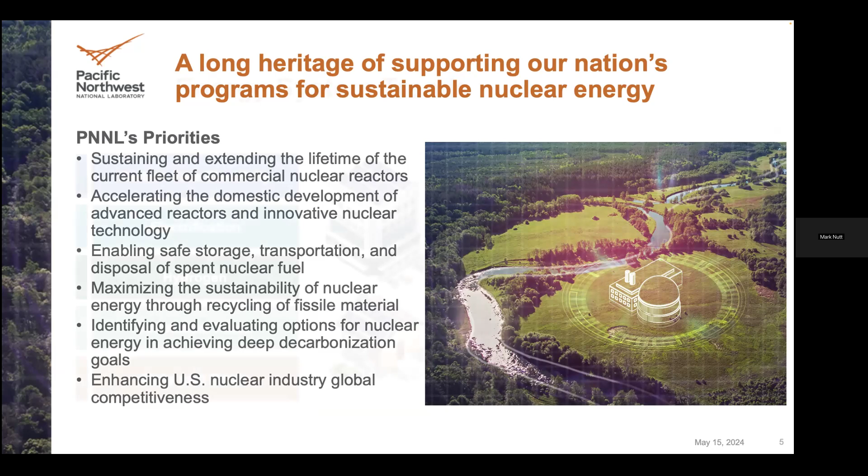So where are we seeing the trends go? A lot of folks want carbon-free electricity. The state of Washington, absolutely, we're supposed to be carbon-free by 2045. Driving that is a big drive toward electrification—electric cars, electric everything in your house, electric heaters and steel mills, you name it, they're trying to electrify it so they can get the carbon off it. Also use it to generate hydrogen—huge hydrogen fuels for potential heavy haul trucks, trains, boats, driving on hydrogen, as well as other alternative fuels that could be more carbon neutral.

That's driving it, and we're wanting to do it fast and big. The demands are growing. We're seeing data centers come online, we're seeing AI stuff come online, we're seeing the onshoring of supply chain and other manufacturing that we're trying to bring back. All that has energy demands.

So that's driving it. As an example, in the Tri-Cities we've got the southern end of the Hanford site that wasn't contaminated. The government is giving lease of that land back to the community, and they're trying to develop it as a clean energy park, clean technology park. One company that wants to build there is a Swiss company called Atlas Agro, and they want to build green fertilizer for agriculture.

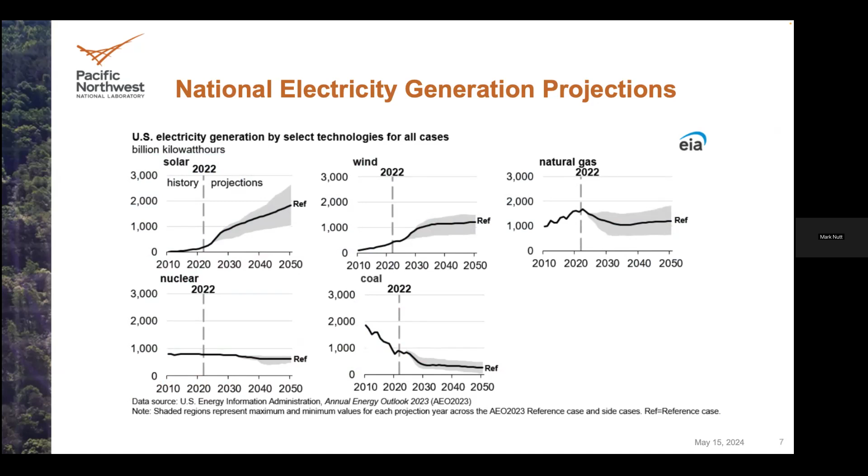Our electricity infrastructure has also gotten—okay, get rid of these things up here. Zoom, probably. I'm trying to figure out where my mouse is. That's just mirroring, I think we're stuck. Oh, there it is, let's do that. Perfect, can I kill that?

So we've got all of this electricity stuff beyond what we've already got to go. So we've got to grow it, and it's got to do all that.

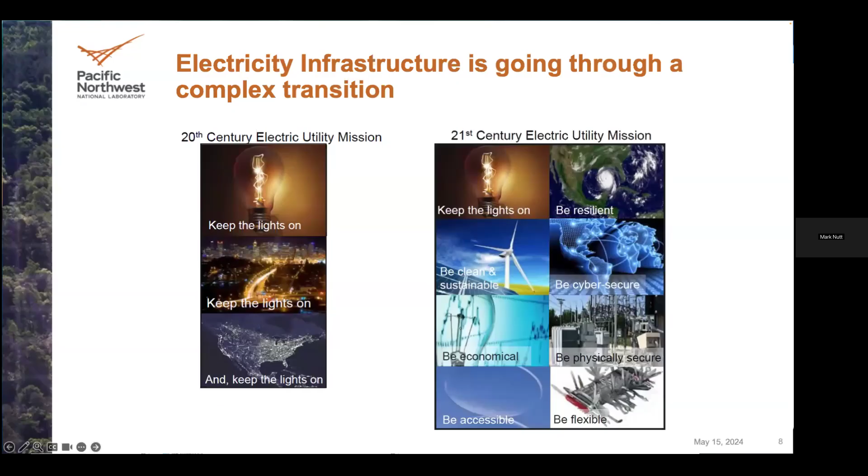Oops, click. Oh, I've got to get back over here. How do I do that? Where's my mouse? No, I just killed it. Oh shoot. Went to the hot corner. Did it again. Love technology. There we go.

So there were two pieces of legislation that came out under this administration that drove impacts. The Infrastructure Investment and Jobs Act put a lot of major investments into innovation and energy infrastructure deployment, so that got things going. The Inflation Reduction Act really put a lot of tax incentives for clean energy adoption.

And what we were seeing up to that was a lot of the existing reactors were getting challenged economically. Back when I was your age going through school, nuclear is very capital intensive to build and very cheap to operate. The fuel and the operation is relatively cheap—big expensive plants to build, cheap to run.

So what started happening is even plants that had been built, the older plants, they'd recovered that investment—they amortized the plants and got their investment back, and we're just running on fuel costs. Everything should be cheap, they should be making money, cheap affordable power. They ran into trouble with natural gas.

So in about 2006-07, everybody was projecting that there was going to be huge demand growth. So there were a lot of people, a lot of companies looking to possibly deploy new nuclear. So there was a lot of licensing actions, a lot of work done. There were going to be a number of plants. It was going to be the nuclear renaissance.

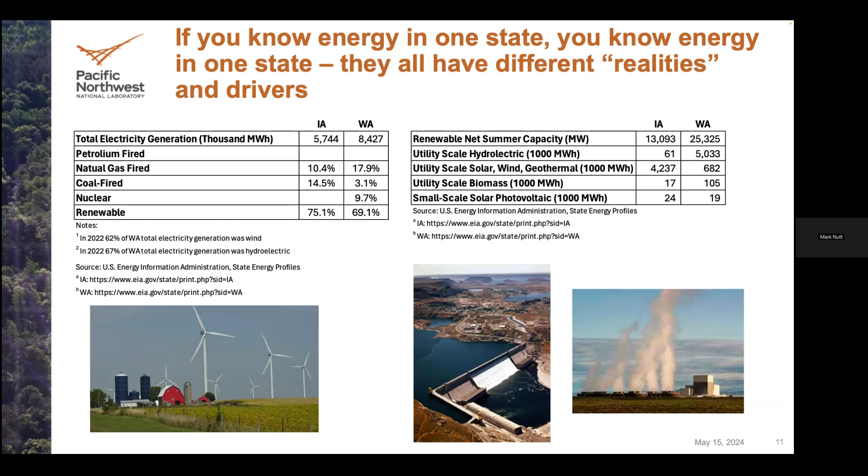So why are we thinking now? Why are people considering it? Well, we've got carbon-free power laws that are out there in Washington. Other states are looking at them. We're wanting resilient energy grids as the demand goes up. A lot of demand. We need the grid to be resilient to respond to that.

We're seeing intermittent load balancing. You're seeing solar go on and off. You're seeing wind go on and off. These machines can be used so that when it's coming down, they can come up so you can ride that wave and keep demand. In some areas, you want firm, reliable power generation. If we build that fertilizer plant, we need to come up with 350 megawatts steady. And you could do it with that.

You can also do island mode. So if I have a data center, like Amazon, I want to control my own destiny. I don't want to be part of the electric grid. I'm going to deploy my own plants and they're going to power my data center. They can do that. They can also do what they call black start capability. So if you lose the grid, you don't have to have power coming in to bring your reactor back up. You can bring them from nothing to running full time.

And literally there could just be a saturation of renewables. How much wind can you deploy somewhere? How much solar can you deploy somewhere before you just run out of real estate? And you're seeing that. Talking to people when I was back in Iowa about the wind, some of the regulators in the state said, yeah, we're about done. We can't put any more in because we've kind of filled all the land up down that swath.

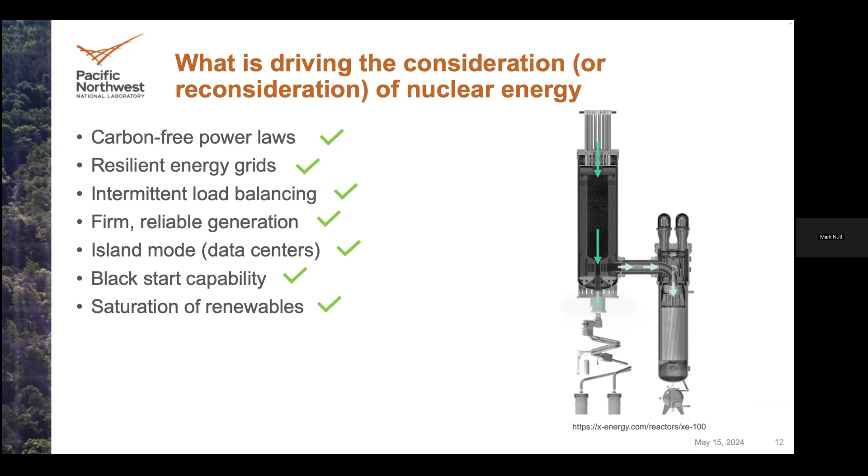Tell me if this is too simple. Basic fission: hit a uranium-235 fissile atom with a neutron. You bust it into 2-3 pieces, and on average 2.5 neutrons come out. You absorb some of them, let some go, and you want one of those to go make another fission, so you keep a critical chain reaction.

Fuel looks like this in one of our existing water reactors. Uranium dioxide ceramic fuel in a tube. The zirconium alloy, highly corrosion-resistant tube gets made into a square fuel assembly. About 200 of these get put into a reactor core, kind of a cylinder. You try to get it as close to a cylinder as you can; ideally a sphere is best for this, but a cylinder will work. You basically use it to turn a turbine. You make steam, you spin a turbine, you get electricity out.

Safety is based on reactivity control. So you've got the chain reaction going on, you're humming along at one, with as many neutrons coming out. You can add reactivity, so I'll pull my control rods out. It'll go a little bit above that, power will take off, drive them back in, level it off. If you need to trip the reactor, you drop the control rods, you absorb all those neutrons, and the nuclear reaction goes away.

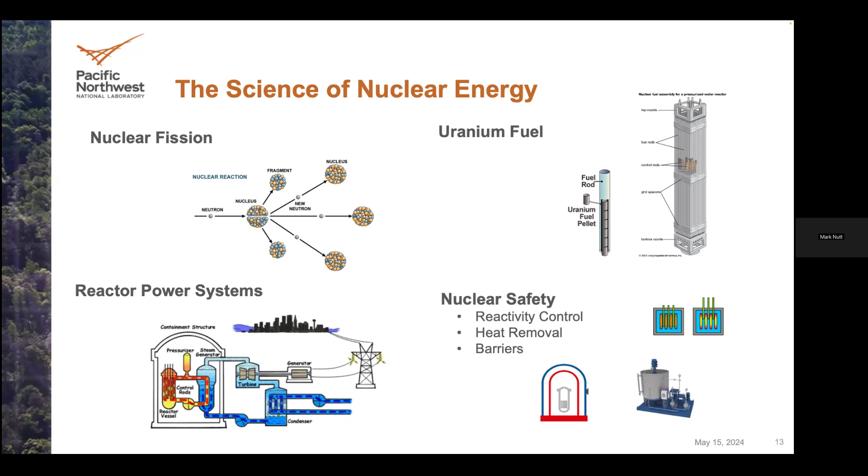Same thing at Three Mile Island. I'll talk to that one in a minute. So another incident. So what's the evolution?

We started with generation 1 reactors in the 40s, right after they got B reactor built over at Hanford, for really big sustaining reactors. We kind of had a split where they went to do defense production, and we started looking at what could be civilian reactors, and they looked at a whole bunch of different types in the 40s and 50s in the generation 1 time frame.

Down selected to what we call light water reactors. They're just water cooled reactors, cleaned up, purified water, regular water. And a lot of that was driven by the Navy going that way for nuclear propulsion. They went with water reactors, so there was a lot of R&D being done on the water reactors that were proven to work in the Navy, and we took that over to the civilian side and built light water reactors.

Essentially all the reactors that we're operating in the US today are Gen 2s. They were all designed for 40 years. Most of them, there's like 1 or 2 left that have not got a license renewal for another 20 years. And there are a few that have received and others underway to get another license renewal to go out to 80 years. So what was a 40-year design is going to be going out upwards of 80 years. A lot of work goes into verifying that, yes, these things are still safe to run and operate.

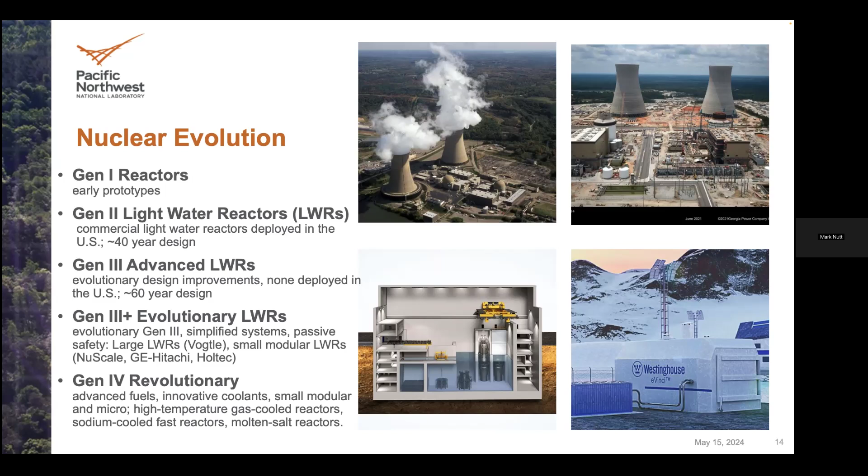And there's the Gen 4. These are the revolutionary machines. Different fuels, different coolants, very different designs that actually capitalize on the work that was done back here and the R&D that was done while these were getting built. So, sodium cooled reactors, those were looked at in the Gen 1 time frame. Gas cooled reactors were looked at then. But we didn't have the technologies. We didn't understand the materials well enough to really want to pursue those industrially. And now we're at the point where, yes, these can come out. We actually have the data where we think we can deploy these.

The big drivers. So what are we looking at in terms of safety? Got to protect public health and safety. There's active, inherent, and passive safety controls. Active: I need to turn that diesel generator on. I need to get my coolant going. I need this pump to turn on. I need this valve to open up. So the machine has to do something to get that coolant going around.

Inherent: can I design stuff to work on physics? As an example, the sodium cooled fast reactors, and why I say fast, they're a different spectrum of neutrons. The light water reactors fission well on slow neutrons, so a neutron will come flying out at about 3 MeV of energy.

Basically, what you do with a light water reactor, it's like playing pool. The one ball hits the other one, that one stops. So you take all the energy out. So I smack it into a hydrogen atom. Hydrogen atom flies away. My neutron is really slow, and then it can cause fission. With a fast reactor, they just get the fuel real close together, and then it'll fission on the fast spectrum. It's just how you design it.

But what those reactors do is when they heat up, there's the material expansion coefficient, the fuel and everything will kind of move a little further apart. And that'll let neutrons go out of the core and not cause fission. So you can actually control safety by just the physics of the reactor. And they did 2 tests on an experimental reactor in Idaho where they turned off the flow, just turn it off. And the reactor heated up and the power went down. And it basically took itself into a stable configuration.

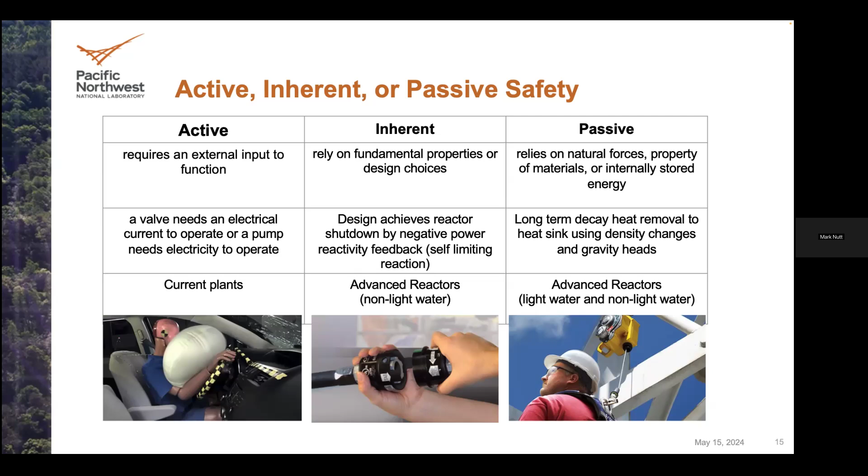So the newer ones are using a lot of combinations of inherent and passive safety to make the newer designs. We have a heck of a good track record on the Gen 2s. There are a lot of active systems, but these newer designs can even be better. And what will that give us? Well, let's step back. So our current power generation, about 95 plants operate in the country. We got demonstrated safety, except for the Three Mile Island accident, which was an interesting one. And you hear talk about automation versus human control.

What they found out with that one in the 1970s is they had a very small leak. And the operators didn't figure it out right. They couldn't read the indication, so they kept overriding it and basically caused the water to go out of the core. They melted the fuel. They had what's called a partial meltdown and melted the fuel about halfway down before they figured out what it was. So there's a lot of work that was done in human factors, getting the operators to understand what they were seeing. There's a lot of work in controls and just culture, and it's kind of like, leave the darn thing alone. It'll trip itself. If it sees it's doing something wrong, let the machine do it. It's how we've designed it. So besides that accident, we've had really good safety.

We've driven capacity factors up over 90%. So while that plant is running, over a year, you're getting over 90% of it dumping power to the grid at its rated level. So if it's a 1,000 megawatt plant, you're getting a 1,000 megawatt plant 90% of the time. You refuel about every 18 to 24 months. So if I got a 2-year refueling cycle, I'm running at 90% or over for 24 months, just straight deliver power. Real high reliability, they're carbon free, they're firm, secure power. So a lot of dependability to the grid with this kind of plant.

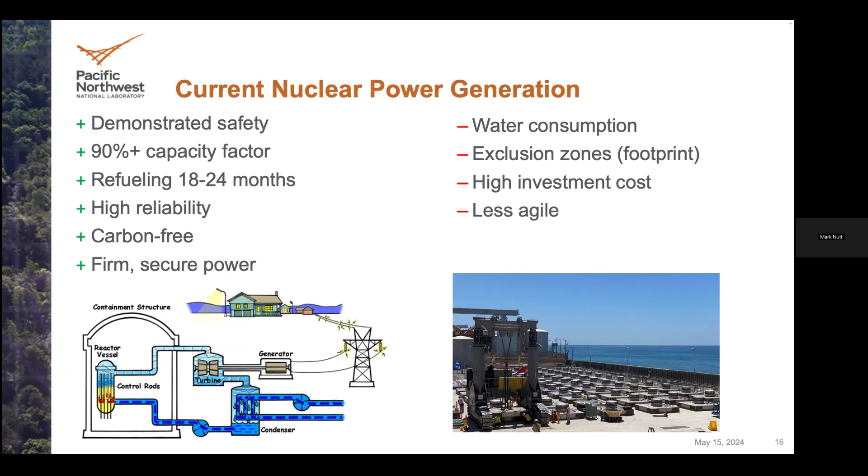So what is an advanced reactor? There's typically a lot of confusion on this. Everybody thinks advanced reactor means SMR, small modular reactor, because that's kind of become the buzzword. In reality, there are kind of three types. There's the big, large ones that run typically 300 megawatts to 1,000 megawatts. These tend to be built on site. You're going to bring in all the pieces, put the reactor together, basically do a big construction, build the whole thing, and get it up and running. Small modular reactors run about 20 to 300 megawatts. The idea with that is I can do a factory build on the reactor, bring it out, plop it in in modules and get it up and running.

One of the fundamental differences is how we're set up in a lot of states for energy: if I'm building this reactor, I can't recover any money from ratepayers until the thing is up and running. So I've got to spend all that capital to deploy 1,000 megawatts before I get a dime back, and I have to borrow all that money, and the interest gets really expensive. So the idea here is to build what you need, put a module in, start generating power, getting revenue, then put your second, third, fourth one in, so you're not taking such a huge capital hit at the beginning.

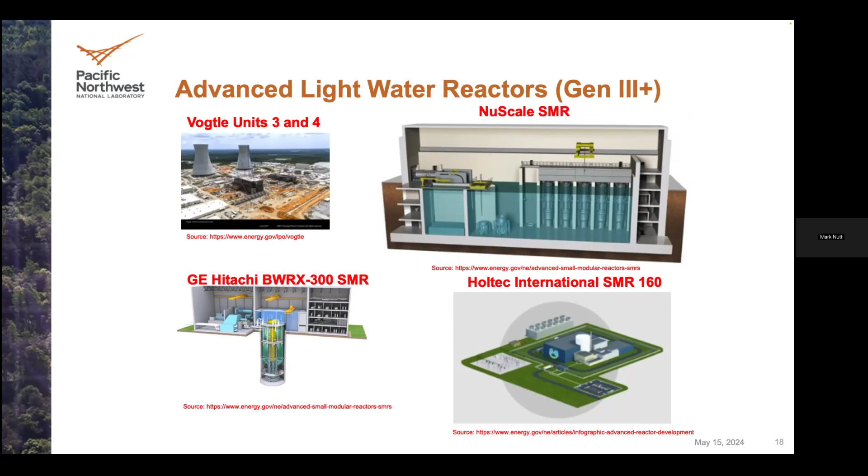So the other side is some of the advanced reactors that are underway. A lot of these are being supported by DOE's Advanced Reactor Demonstration Program. It's basically a 50-50 cost share between government and industry to get these new reactors deployed. How this came about was there were a lot of people, labs and industry and everybody saying, we've done a lot of R&D work. We know how to build these. We just need help. Congress, US government, take some risk off these so they can get a demo done.

We're all talking and Congress finally went, all right, we're calling your bluff. Here's your check, go do it. And now it's like they're kind of like the dog who caught the bus. Like, oh, and we got to do this in 5 years. So there's real heavy drive on these two.

So Natrium is a sodium cooled fast reactor. As I mentioned that earlier, that's one really cool. Sodium goes through fast neutrons. There's been a couple of experimental reactors done, 2 in Idaho, 1 in Washington, over by my side of the state. So there's a lot of test and demo reactors that inform this one. So they're going to build theirs in Kemmerer, Wyoming.

There's been a lot of drive to, can we put new nuclear at retiring coal stations and capitalize on the infrastructure? We need water. We need to hook them up to the grid, because it's almost as hard to build new transmission as it is to build a nuclear plant with all the environmental laws, the permitting, getting the land rights to go. So they're going in there.

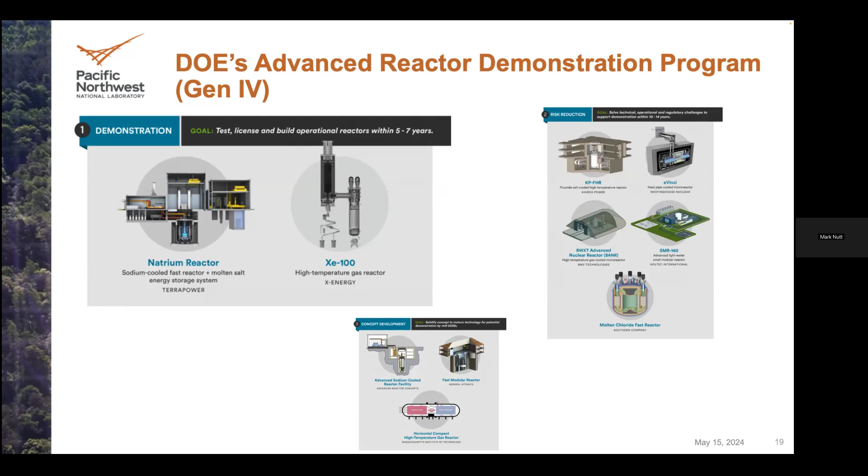This technology fits into our forte at PNNL, because we've got strong materials and chemistry labs. This is less of a nuclear problem and more of a materials and chemistry problem. If you've got liquid fuel, the physics is easy — no pins, no funky stuff. It's just a homogeneous solution with fuel in it, so the physics calculations are easy. But salt likes to eat stuff up, so how are you going to maintain that thing?

What are the challenges of some of these? Again, there's capital costs, and one interesting one is capacity accreditation. One thing utilities have to do is called resource adequacy — as a utility, I have to demonstrate I have sufficient capacity to provide my customers power on the coldest day, the hottest day, whenever they're demanding it. You have to know what your plant is when you do these assessments, to say I can count on this plant for 500 megawatts, 75% of the time. We don't know that yet with these new reactors, so it's hard to figure how to fit them into those assessments while still meeting resource adequacy constraints.

There's also questions with cost modeling over 60 to 100 years for these reactors, which we really don't know a lot about. That's part of what the demonstrations are for — can we get those through and get some data on it.

We have a dearth of construction experience, and there are challenges in the fuel supply chain. There's a lot of uranium in the US, a lot in Canada, a lot in Australia, a lot in Russia, and a lot in Kazakhstan. But the US kind of shut down its domestic mining, and we shut down our domestic enrichment.

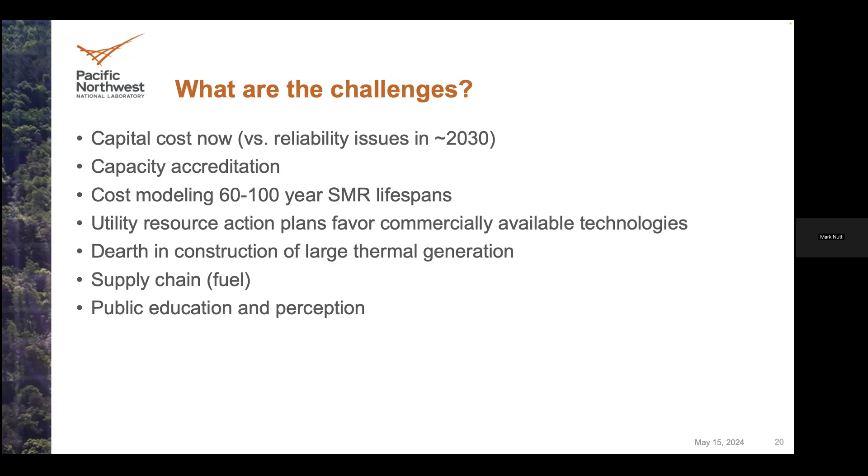And we're trying to bring it back. We got more anxious to bring it back after the Russian invasion of Ukraine — we shut down all interactions with Russia, and suddenly that supply just went away. We've got to figure something out. So there's a lot going on there.

So what are the benefits? Modular design, factory built, scalable. I can feed my data center with a few or a bunch. I can do underground construction to get rid of some of the seismic constraints. I can build it on a smaller footprint. And given a lot of the safety features, I can have smaller exclusion zones.

So when you're building one of these, you have to plan for what you're going to do if there's a big event. With some of these big reactors, with a lot of that active control, our regulators said that exclusion zone can be 50 miles in radius. So you, the utility, have to plan for what you're going to do with everybody within a 50-mile radius. That means you typically got a site in the middle of bloody nowhere where the power's way over here.

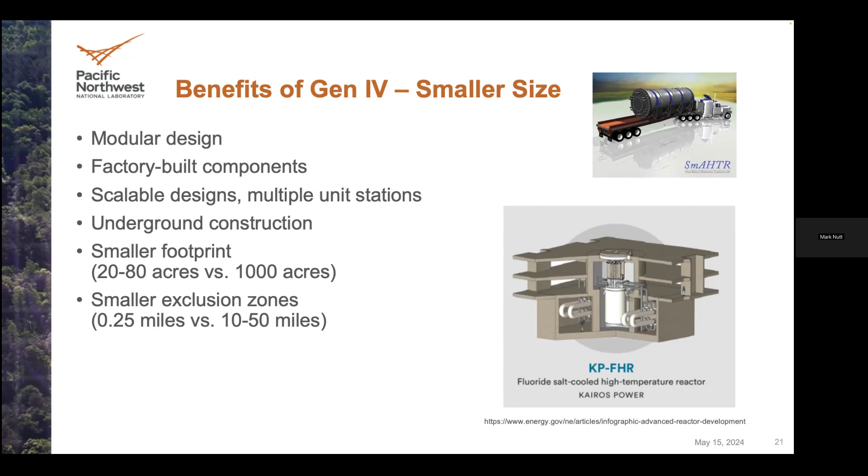With these, they're much safer. So the NRC is allowing you to collapse the exclusion zone, and it's just not as bad. Some of them, they're saying the exclusion zone could be at the plant boundary. That really makes life easier for how you have to plan, because you're not expecting to get that catastrophic accident. You're not expecting to anyway.

They're versatile, they can be flexible. They can load follow, so they can go up and down. They can ramp quickly. The existing reactors, you have to go up really slowly so you don't stress the fuel. These things can move fast. They can black start, I talked about that. They have real short refueling times. Some of them have no refueling times.

I got a molten salt reactor. I'm running a loop. All I got to do is drip in some fresh uranium and then have something on the other side cleaning it up and purifying and getting all the fission products out to keep it going. So I can even keep it running the whole time. They do use less water. There's actually some of the designs they're looking at, like Natrium, they can possibly do air cooled, so I could get away from even having water. All that opens up more siting options.

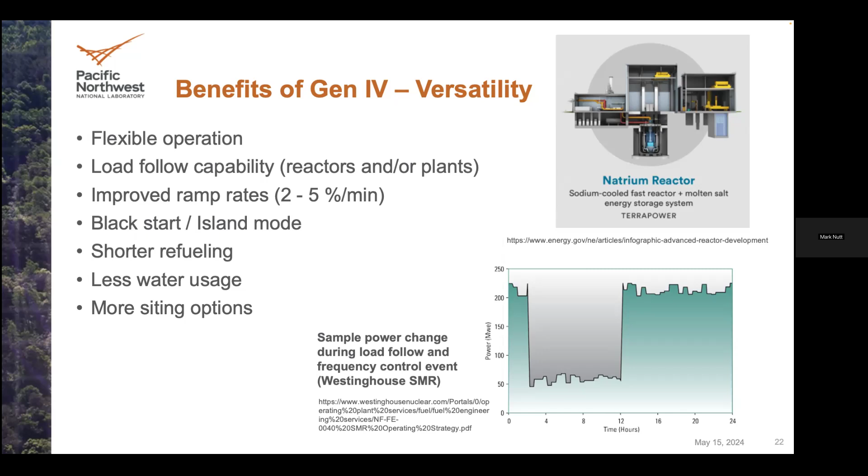I talked about the fuel. This is what TRISO looks like. Here's the fuel kind of in here, a couple layers, 2 or 3 layers of highly non-porous material. And this thing is the size of a tiny little kernel, like a seed, tomato seed, tiny. And you put a bunch of these into a ball of graphite. And you literally put them in and you float gas through, and they just kind of float, and you just move them up through the core on a pebble bed.

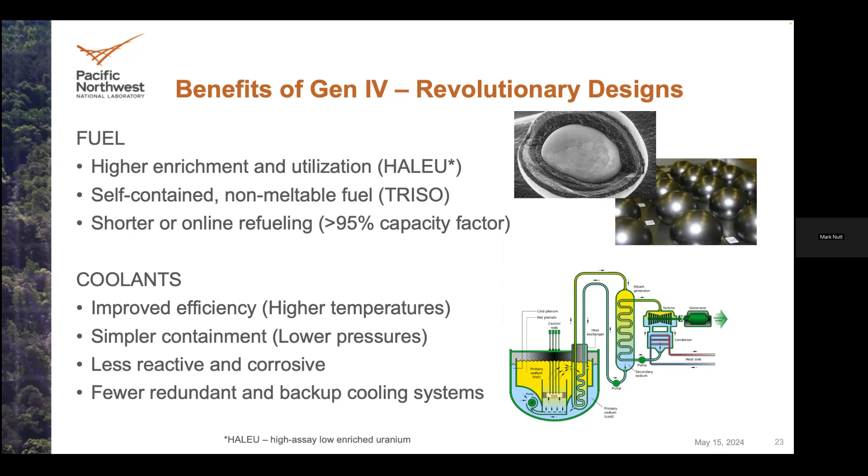Coolants improve efficiencies. I can have simpler containments because I'm operating at lower pressures. They're less reactive and corrosive. You know, liquid sodium is not corrosive at all, no problems, but it burns in air. So if I get a little crack, I got an issue. So a lot of these are covered in argon gases. And fewer redundancy needed.

Our new fleet - I talked about NuScale, they were going to put their facility, their first reactor, in Idaho. That project got canceled. Got canceled, not for safety reasons, it got canceled because there were too many people worried about whether there would be cost overruns. So they could not get the municipality subscriptions - they couldn't get enough people to buy the power, so they had to cancel the project. GE Hitachi and the Tennessee Valley Authority are pursuing putting one at the Clinch River site.

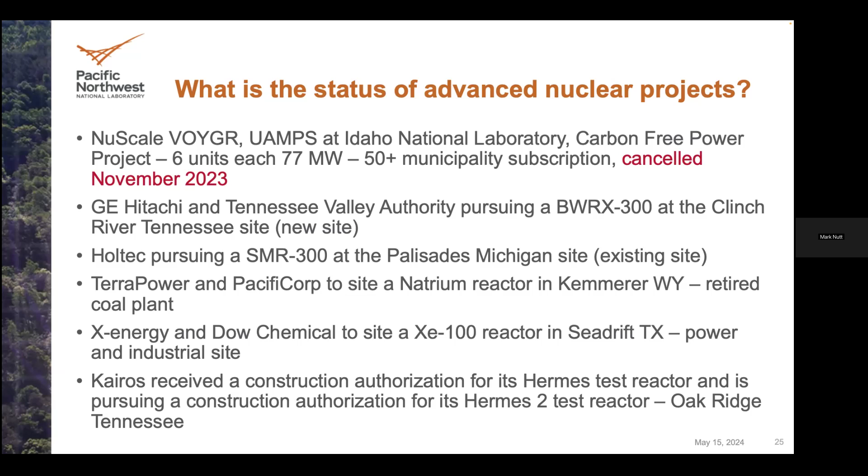Talked about TerraPower in Kemmerer, Wyoming, X Energy in Texas, Kairos, the test reactor side. There's a couple more on this. So they shut down the Three Mile Island plant in Pennsylvania. And now they're going to want to restart that one just to provide power to Microsoft. There's talk of restarting a nuclear power plant that was shut down in Iowa to provide power for data centers there. So plants that came down are starting to get talked about re-upping.

States are active. A lot of things are changing legislation-wise. There's laws being changed to put value on carbon-free electricity in these states. There's financing and tax incentives going on in some of these states. So again, every state's different. They're going after the climate side. They're trying to incentivize based on money.

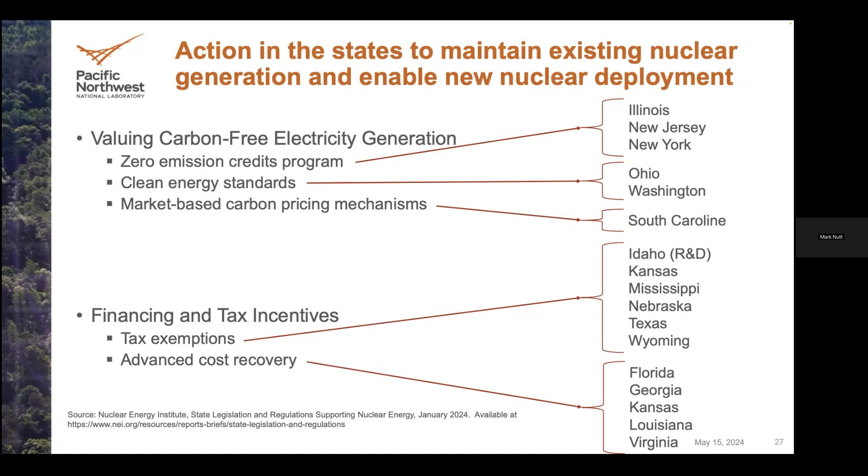There's a lot of prohibitions in place that were put in place in the 80s and 90s. So there's states that are overriding the prohibitions against nuclear energy. And I had the pleasure of actually going to the legislature in Illinois just to talk about it, kind of like I had with you guys. And the congressman that sponsored the bill understood it. He's like, you know, we have to figure out what we're going to do in Illinois.

And we can't even talk to a utility or a developer, because we have a law against it. They don't even want to talk to us. So until we get that overcome, we can't even have that conversation. So that's kind of why they did it. And a lot of these other ones are doing it. Minnesota's still on the list of having a moratorium. They got close a couple of years ago to lifting it, but they just couldn't get it over the line. There's still a few that are in play here.

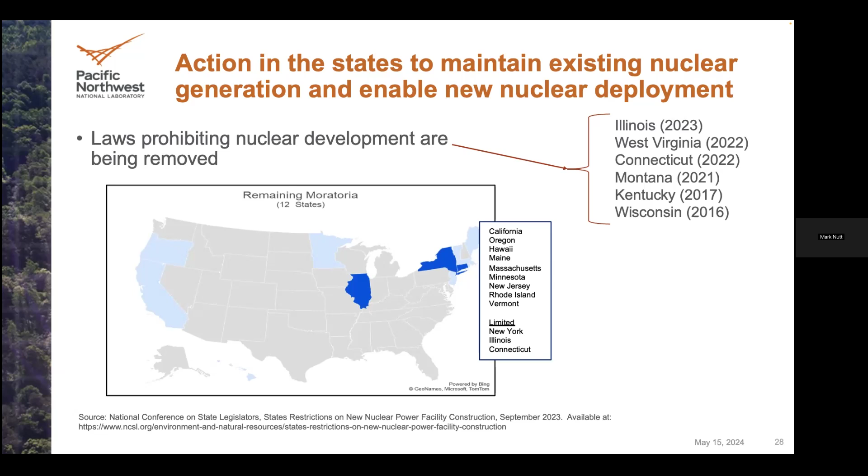And whoop, hit it again, darn it. Must have that mouse right by that.